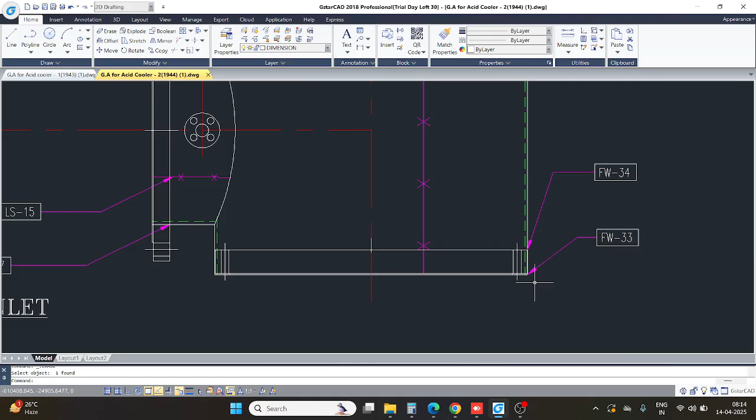So this is a water inlet nozzle and this is a water channel box with a flange. So firstly, the water channel box of dish end type is directly welded or it is made from a single piece of a pipe. To join the roll of the pipe, we use a long seam. Similarly, to join the flanges to the water channel box, we use fillet weld, and similarly for the stubbing. So this is a basic fundamental.

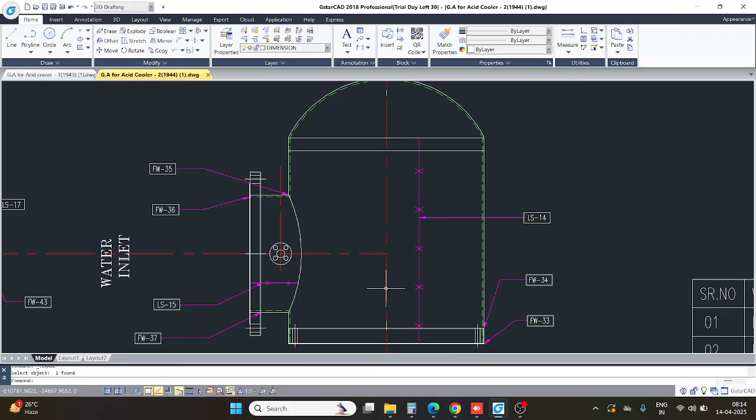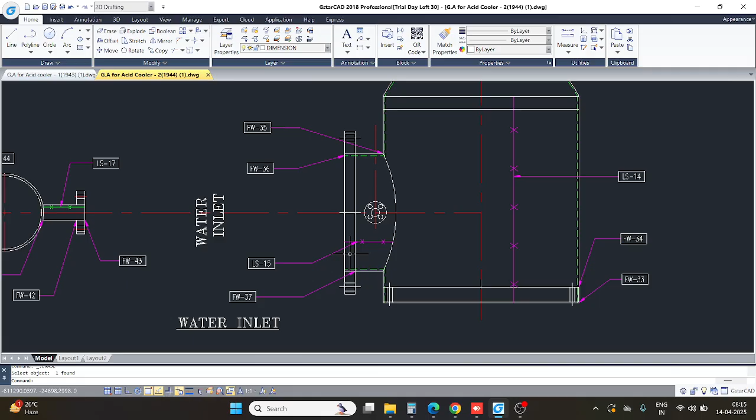The water inlet nozzle has been welded to the shell or the water channel box through the fillet weld. Similarly, the nozzle pipe used is made through a roll or from a plate. So again, to join the roll part, we use the LS weld. The LS weld numbering has been provided. Similarly, the flanges for the nozzle have been welded using the fillet weld. So this is how a water channel box weld map is created.

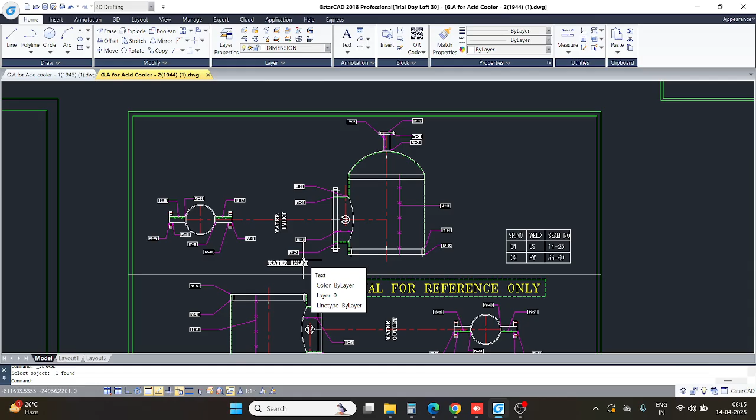The weld map is used for better clarification of the weld seams. Similarly, to check whether there are any faults during the welding or the assembly line, so that we can reject the future problems at the preliminary stage. And thirdly, it is used for better clarification.

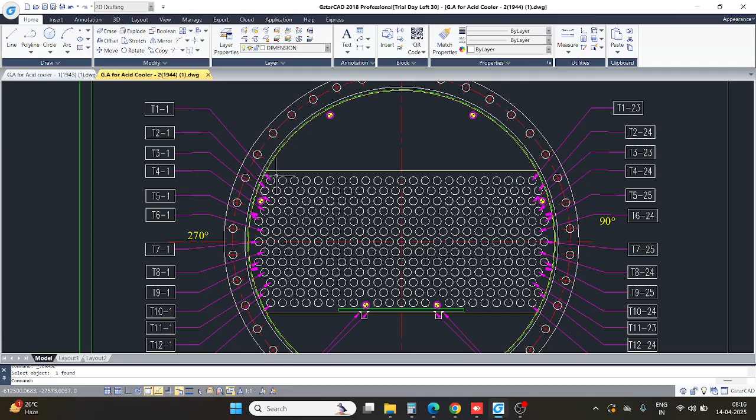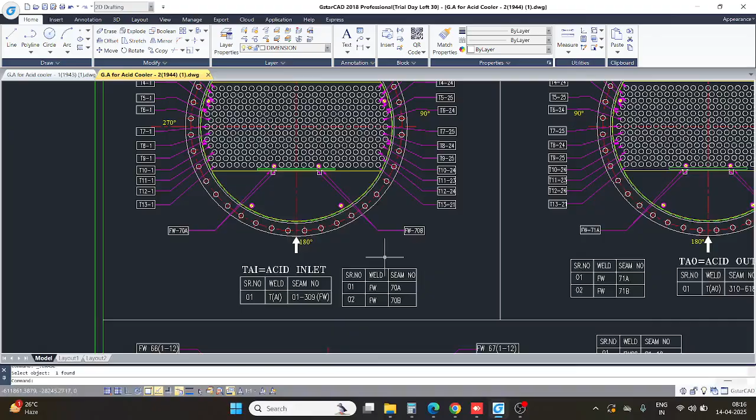So the tube welds are provided with the tube numberings, or you can say the serial numbers. So the tubes are welded to the outer surface. Similarly, the impingement plate, as you can see, is welded to the tube sheet through fillet weld. And the sealing strip is also welded using fillet weld. So this is the basic fundamental of how a tube sheet has been welded, and similarly the welds can be seen in the baffles.